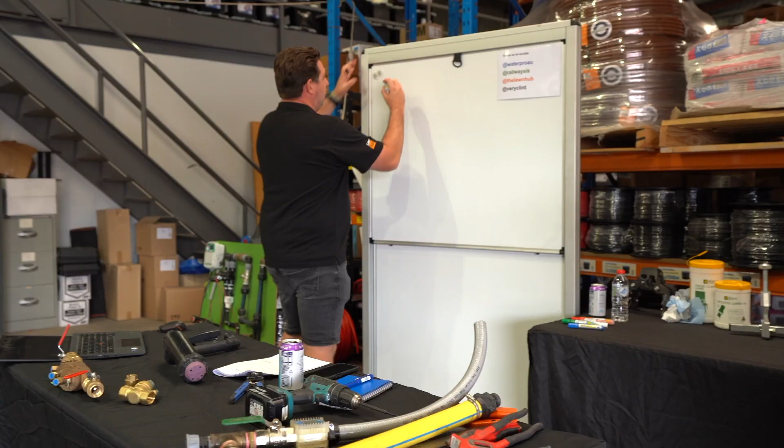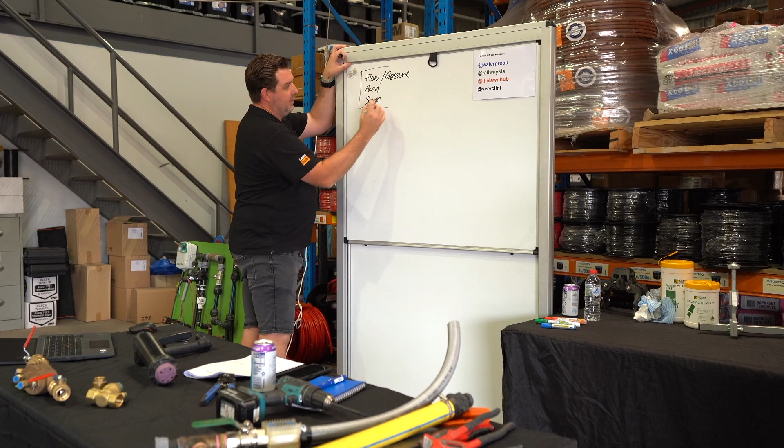So when we do an irrigation design, we require a few things. Obviously, we require the area that we're irrigating. We require the specification, so we've just talked about that specification. I might write this down as I'm doing it, actually. So we need the flow and the pressure, or the flow versus pressure. We need the area, we need the spec, and then what they want to do.

So we'll go to Mount Barker this time because I've said Playford enough. So we're doing some work for the city of Mount Barker. We might have a council specification, which they do, and then we'll have a landscaper that's asked us to do a design and construct because they're going to be doing the work. We occasionally get engaged to do a pressure versus flow test on behalf of our commercial clients so that you guys don't need to do it. Obviously, it's a third party doing the test, so the burden of it being right falls back on us.

We use our GPS unit to do a walk around of the area, so we know exactly where the oval starts and finishes and where the garden beds are going to be. If that area hasn't been built yet, then we'll rely on landscape architects' plans to design around. We'll look at the specification, and then we'll start the irrigation design process. The one thing that's not clearly outlined initially is the pressure versus flow test.

So we've got these test kits that we use and hire and lend. This is by no means a sales thing. Most commercial businesses would have a version of this in their business already. So we would use this to test the flow and the pressure.

Actually, I probably should go lower, shouldn't I? I keep forgetting about my cameras.

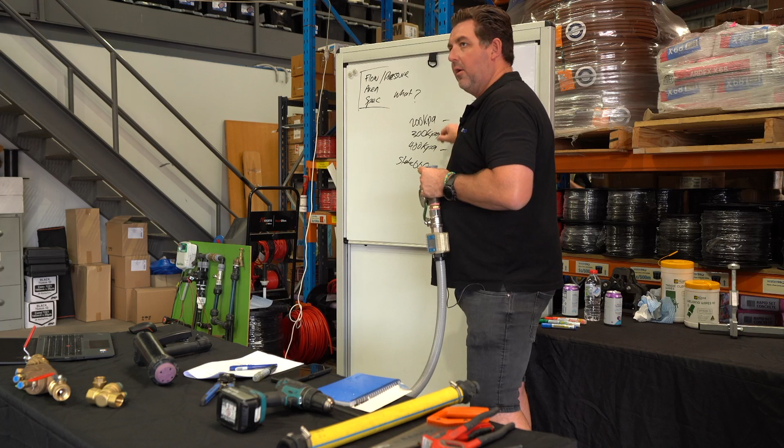So what you'll find is those flow rates will change as they go. Like, we'll open it and get to 400. We might get 60 litres a minute coming out. We might go to 300 and get 80 litres, and we might go to 200 and go to 100 litres. So the more we're opening that up, the more water's coming out in litres per minute, but it's at a different pressure.

And that's important to know for a lot of people that are beginning in irrigation. They're not aware that there's a difference between pressure and flow, and sprinklers require both numbers. Both numbers are important, so you'll find that you need a certain litres per minute with a certain pressure for a sprinkler to pop up and operate.

If we were getting static pressures below 440, that's when we'd probably start having a conversation about putting a tank and a pump in. A sprinkler is going to need 350, and so with that 440, we start getting losses through things like backflow. So that's a backflow prevention device, which is what I was talking about before. You might lose 50 kPa through this, and it varies depending on the backflow, and all that data is available on the product information sheets that come with these.

But yeah, once we get below 440, we're really putting in a tank and a pump, and in a lot of cases the flow's enough, so we might be getting 120 litres a minute, but at 200 kPa. So we can put a small tank in, have the 120 litres a minute fall into the tank, have a pump in the tank that's pushing the water out at the same speed, but at a higher pressure.

So you don't necessarily need to have a 40,000 litre tank, and sometimes you might need to. Sometimes you can have a 5,000 litre tank, and all it's doing is taking the water that's low pressure at the right flow and pumping it out at the right pressure at the right flow. Does that make sense? Yep. If not, I can talk about that again in more detail after.

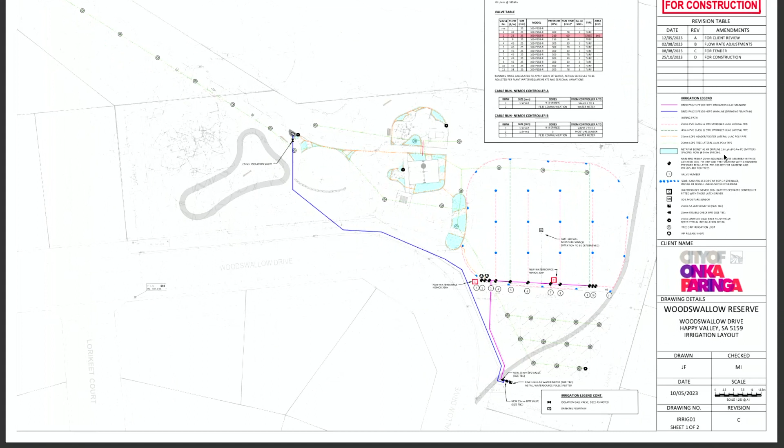So I guess on that, I would encourage you to all do a pressure versus flow test on your sites before you start installing, and see that it matches up with the, where's that PDF gone? So most companies will put a section on here around the pressure versus flow. So we've got our system duty up here. I know you probably can't see it, but I think it says 45 litres a minute at 385 kPa.

I guess when something goes wrong on site, there's two sides to it. There's one, let's fix it, and there's the other, who we're going to blame. And I think the best way to avoid the who we're going to blame, or maybe let's fix, probably both of them, is to find these situations before they happen.

So if there's a system duty issue and the water flow will not do what it needs to do, so you think we've designed this irrigation system based on numbers that we understand are correct, and then something's changed on site. There's been a bunch of houses built behind there, the water authority has dropped the pressure because they're getting too many water bursts. A new school's been built, there's lots of things that can affect the flow.

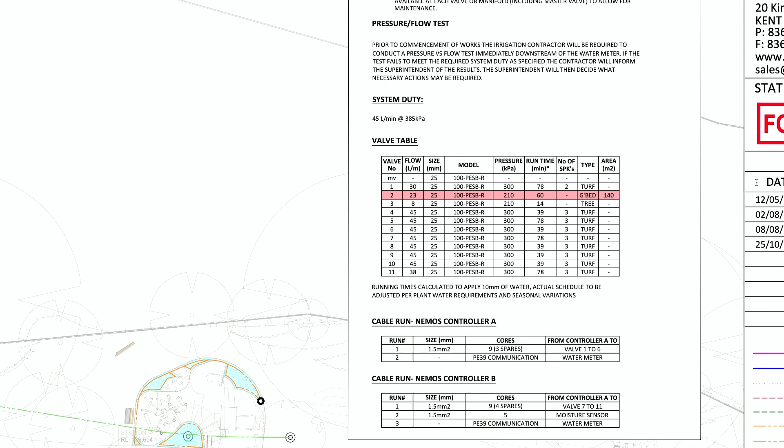If you do a pressure versus flow test at the time of install, before you start digging up any ground, it gives you an opportunity as a contractor to go back to either the designer, the landscape architect, or the client and say, something's changed. Do you want us to just stick it in and you're going to pay for a system that doesn't work, or do you want to redesign it, or do you want to put a tank in, or how do you want to handle it? Because when we quoted the job, we quoted it based on the design.

The flow doesn't match that design now, and we've had situations where the council will say, oh yeah, we probably didn't take that into consideration. We're happy to get a variation for a tank and a pump. Obviously that gives you more work as a contractor, but it also ensures that the system's going to actually work.

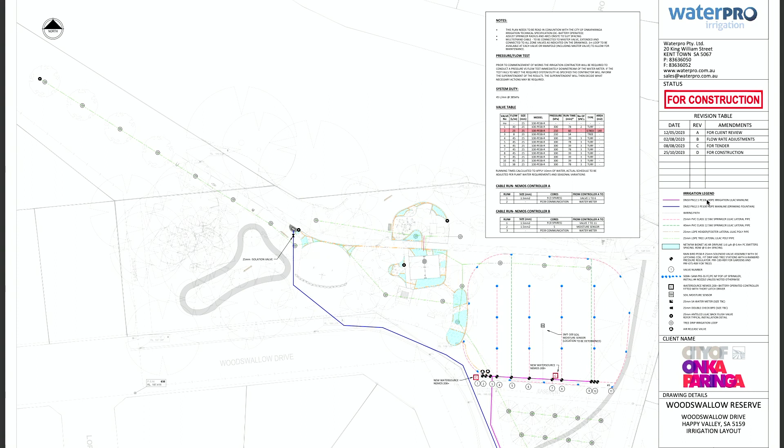So I would encourage you, once you get those plans, to check over those dot points that I've put there before you start installing the job, and really, almost counterintuitively, read the instructions before you start putting the shelves together, kind of thing. And I know for me that's not something that I would usually do, but you almost start building this in your head before you start digging trenches, because it's very easy for our design team to draw a line on a piece of paper. It takes them half a second, but that same line might take you half a day.

And if you can pick up on issues that you might see arising before you start, or even suggested changes, we're not closed off to the concept of making changes or improvements around our designs. Like, if you say, look, it doesn't make sense that the main line goes all the way down there, can we just shorten it 20 meters? It's less than a roll, then there's a commercial implication to that. We don't have to buy a 500 meter roll of cable, we can buy a 100 meter roll of cable.

We're open to that, and if we can take that back to your client and say, look, we've redesigned it with a shorter main line, are you happy with it? They'll be like, yeah, that's fine, that makes sense. They'll probably want some money for it, but we'll use different reasons. So

I'll talk briefly about precipitation. All of this, get your spec, get your plan. The designers are really effectively trying to mirror rainfall in an area. Obviously, if it rained every day for 5 mil of equivalent rainfall on every area, we wouldn't need irrigation. It's not the case, and here in South Australia we go for long periods of time without rainfall. So what we're doing as an irrigation design company, and you as an installer, is trying to simulate even rainfall over lawns and gardens.

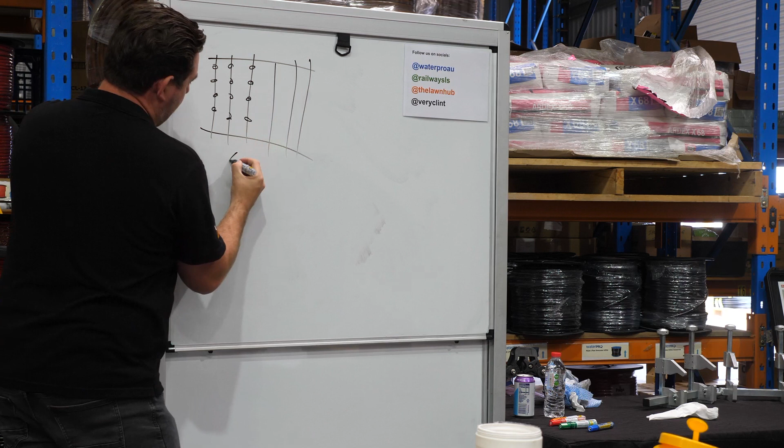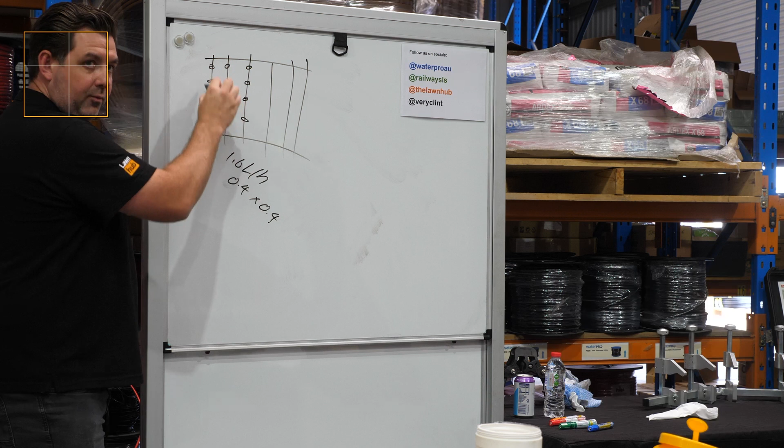So in South Australia, drip tube is installed at 0.4, 0.4, 1.6 a lot. And so there'll be a dripper every 400 in all directions, right? And they're 1.6 litres per hour, 0.4 by 0.4. So when we install drip tube at 400 mil spacing that way, and the drip is 400 mil apart, and use a 1.6 litre per hour dripper, that area gets 10 mil of equivalent rainfall per square metre per hour.

And that's important because we can use that information to understand scheduling, and then the councils can use that information to work out watering budgets and when they're going to be watering and watering windows, and all of that's really important, and I'll talk about that.

If you start putting drip tube closer together, so 0.3, 0.3 or 0.3, 0.4, that number, that's 10 mil, goes up to 13, then up to 17. So if you're doing 0.3, 0.3, it's kind of 17.7 mil recurring, which is too much water in some cases for the soil profile to take. So we're thinking about how much water the soil can take when we're designing these systems as well.

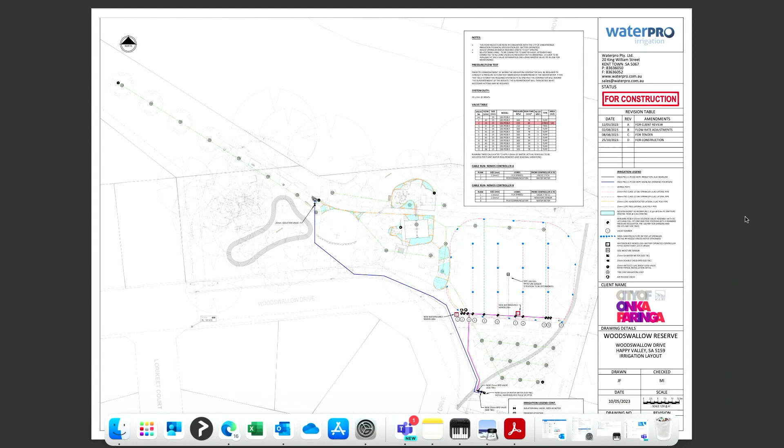And that's why when you look in the Playford spec, you'll see that it's 0.4, 0.4, 1.6. It makes it very easy for them because 10 is such an easy number to schedule and an easy number for them to divide on site. Can you bring that plan up again, Kira? You might start to see it on more plans now, but we do it on their plans definitely. And can you zoom in on that table, please?

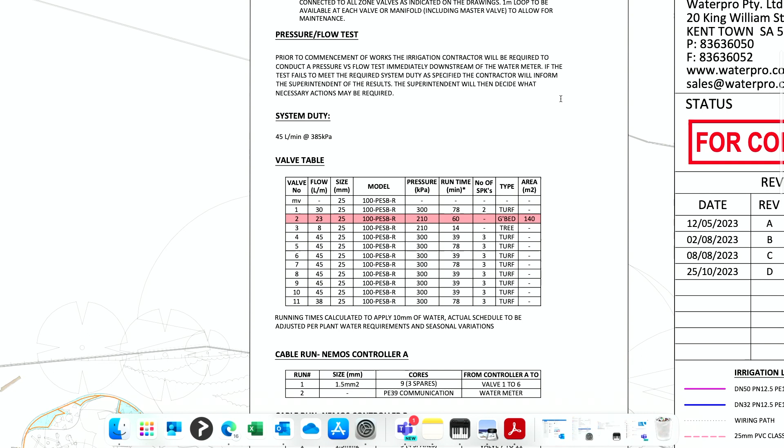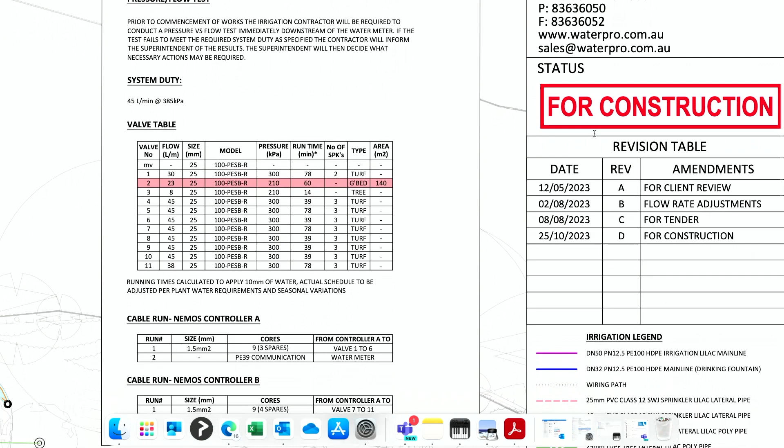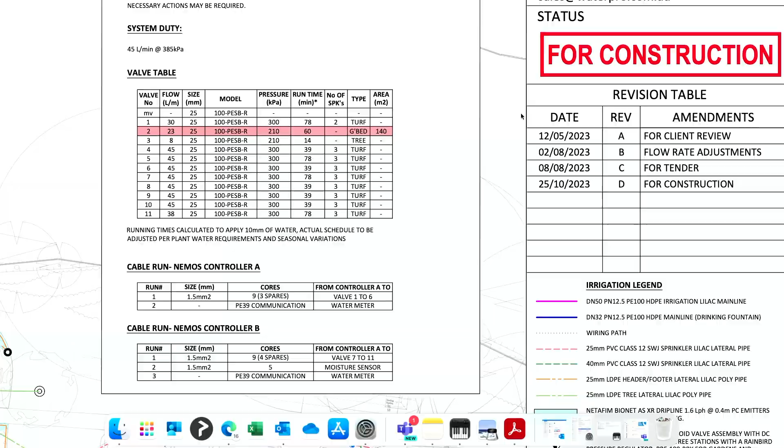Up here, we actually have, is it there? What's that asterisk mean? Usually, we will have the number of minutes required to deliver 10 mil. And I'm thinking that's what that number is. Yeah, that would make sense because the drip tube is 60 minutes. So Playford asked for that. They want that information so that they can reverse engineer what they desire.

So they've got IPOS. There's a standard that is designed to be met to keep turf at a certain level. So if you're an A-grade cricket pitch or a footy field, they might say that needs to be IPOS level whatever. And to do that, you need to deliver 25 mil of equivalent rainfall to every square metre every week for that lawn to grow to that condition under normal weather conditions, which might be 30 degrees Celsius. And then they scale that up and down depending on it getting too hot or if rain events occur.

So if that was the case for garden and they needed to deliver 25 mil a week, they know that they've got 10 mil per hour on irrigation, so they just need to divide that 25 by 10, and then they work out that they've got to do 2.5 hours of irrigation over the week, and then it really comes down to the council understanding when they want that to happen. And obviously, you don't want to do that every day and have micro watering events because you really want to encourage deep root watering.

So we might divide that into two 1.25-hour waterings, 3 to 4 days apart, with the idea that the water gets deep into the soil to encourage root growth, which is not really anything that we take into account because the scheduling occurs after we or Waterpro have been involved.

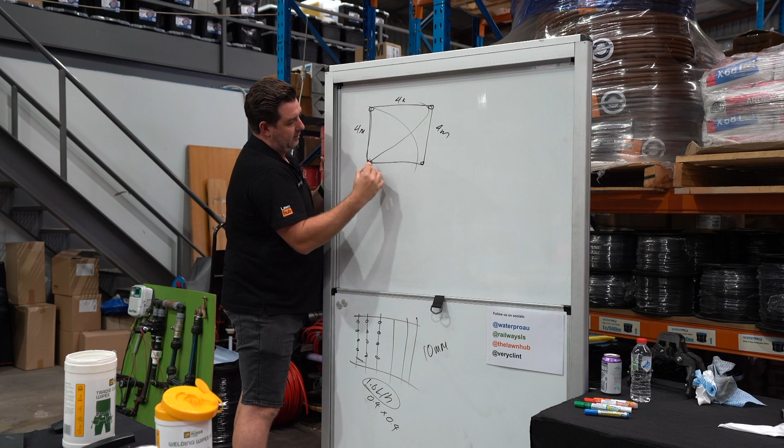So I'll just draw the reason behind what I'm talking about with MP rotators. So when you have a basic square, let's say 4 meters by 4 meters, it's probably 4.1, we can put an MP rotator in each corner, and all they'll do is they just go head to head on each sprinkler. And we don't need to put, say, these two on for a different amount of time to these two. They can all go on at the same time, and they're designed to match.

So when I'm talking about matched precipitation, we could put a catch can anywhere on this lawn, and the amount of water that falls into that plastic can will be equivalent to the amount of water that falls into that plastic can, and so on. And that's what councils will ask us to audit when we're going out and checking irrigation systems that you may have installed. So if you've done a footy oval or even just a local park, there'll be a desired distribution uniformity, which is, I guess, the inconsistency between these catch cans needs to be at a certain level.

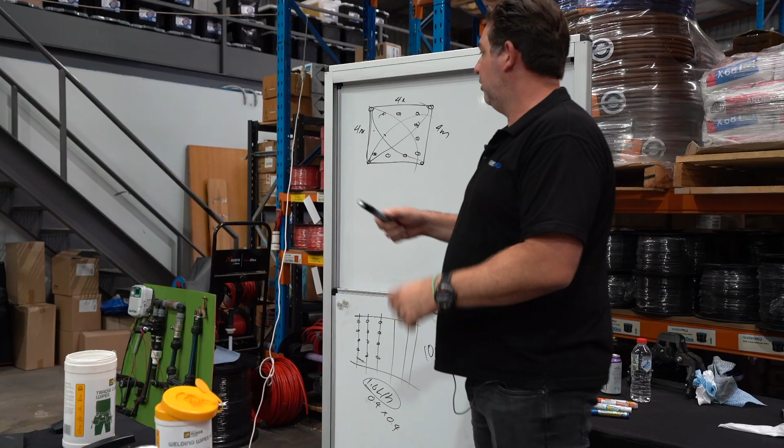The reality is it's never going to be 100%. We would go out and audit a system that hasn't been installed badly. It's just old, and there's sprinklers that might be tilted, or they might be cracked, or the nozzles have been drilled out to get more water out, or any number of stupid things. And the distribution uniformity might be 40 or 50%. The council might be happy with you getting it up to 75. And so the council will say, look, if you can get above 75, and I don't know what Playford are going to do, but I'm going to guess it'll probably be closer to 80. They're going to say that we want an 80% DU to be met on these 3 areas once you finish the job.

And they're not doing this yet. This is just what I can see coming. We would go out and do a catch can test. You could do your own catch can tests to try and check your DUs before you hand the job over, and then obviously pick up any potential issues before they arise.

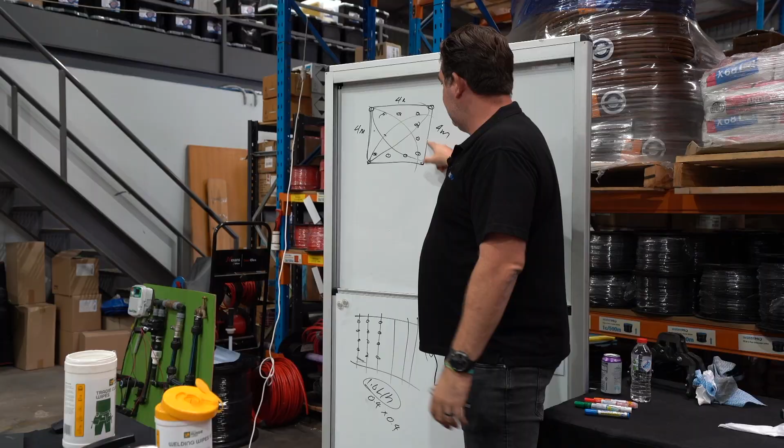Put your cans out, you run your sprinklers for, say, 15 minutes, and then you measure all the volumes, and then you can put them into an Excel spreadsheet. It'll spit out a number and say, look, your DU's this area here is an issue, because they'll have numbers of mils in them, so they might all be consistent except for here, and that it'll be visually obvious because that sprinkler's tilted, or it's not turning, or the water's just falling out of it. And you might be able to see that before you even do the test.

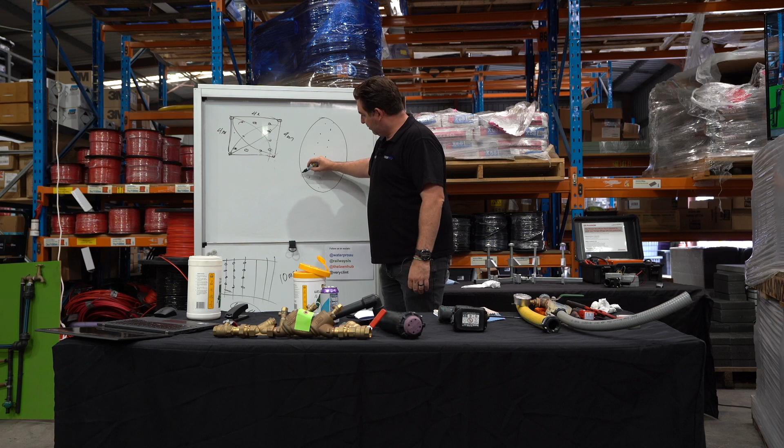The idea behind the test is that they've got something physical from a data standpoint that the council can use to take back to you and say, you need to rectify this, there's a problem. When we do ovals, we don't use MP rotators. So a lot of the matched precipitation needs to be taken into account by our design team. And an oval is probably not a hard one to do because you're kind of just running sprinklers.

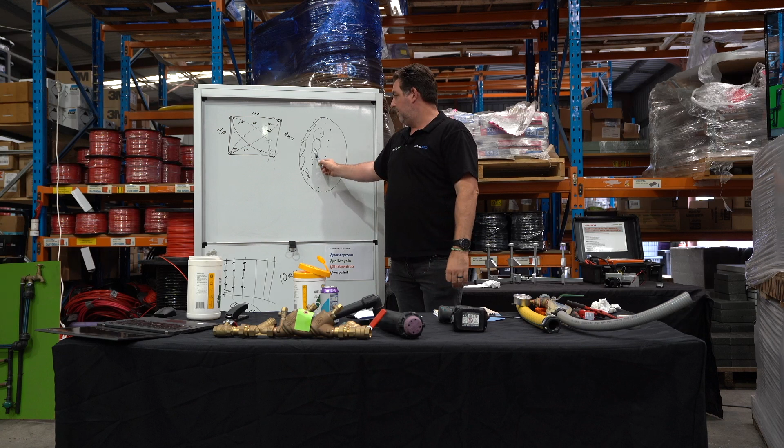This is not by any means a great design. I'm just trying to highlight to you that when we have sprinklers on the outside of an oval, they're generally just doing 180. And when we've got sprinklers in the middle of an oval, they're doing 360s. We would either nozzle down these ones, so we would have a lower flow nozzle on the outside. Sorry, a higher flow nozzle on the outside, because they're going over the same area twice. Is that right? Did I say that right? Lower flow, yeah, because they're passing over the same area twice for every one of that.

Or they all have the same nozzles, but the sprinklers on the outside of the oval are on their own valve, and they water for less time.

Sorry. I got back from 7 days in Fiji yesterday and I'm a little bit doughy still. More doughy than normal.

So we take care of that at design level. You shouldn't have to worry about it, but I think it's important for you to understand it so that guys that are doing enough of this, they'll look at the plan and go, hang on a sec, why are those nozzles the same as those nozzles but the recommended run times haven't changed? Or why is that sprinkler on the same station as that? So we've got a full circle and a half circle on the same valve, but the designer hasn't nozzled them down to make that work.

That doesn't make sense. So you can go back to your designers and go, look, was this just a mistake or was it overlooked? And there might be a reason. They might say, no, those outside sprinklers are actually running 360. They want to water the outer even more. So thanks for asking, but no, it's all good kind of thing. And so that will give you a precipitation rate. Now, I don't even know off the top of my head, but you might find that these 8 doubles might be closer to 25 or 40 mil an hour.

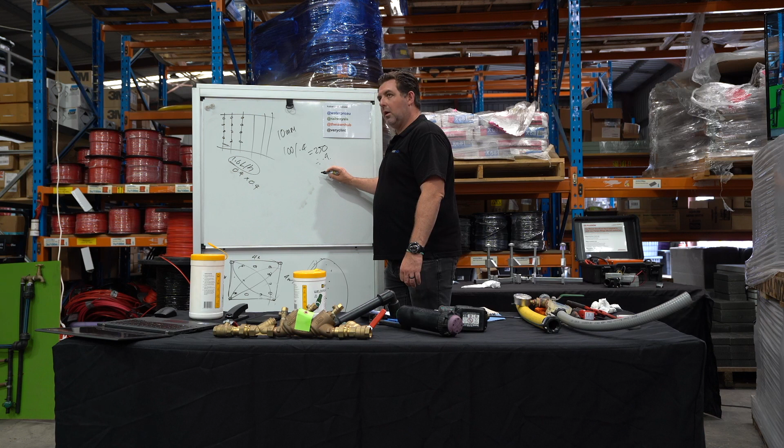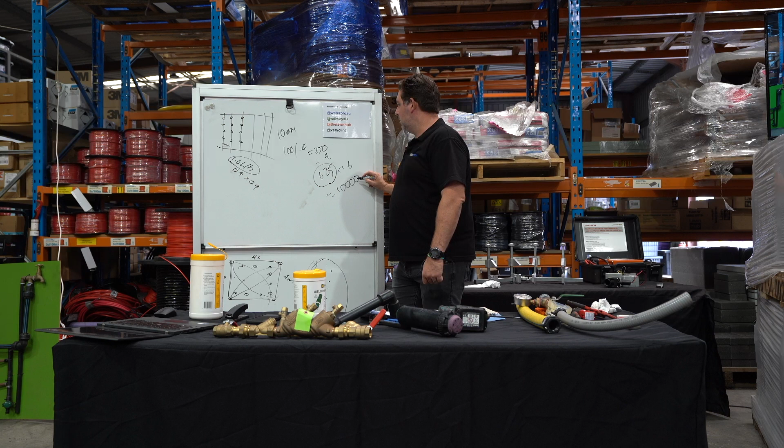So that's how many meters of drip tube would be required for 100 square meters of area. And then if you divide it again by 0.4, you get 625. That's the number of drippers that would be in the area. And then you times that by 1.6, which is 1,000. Times by 1.6 equals 1,000. Is that right? That's weird. Which is the number of litres that's going to get delivered every hour in the 100 square meters. So that's how we get our precip.

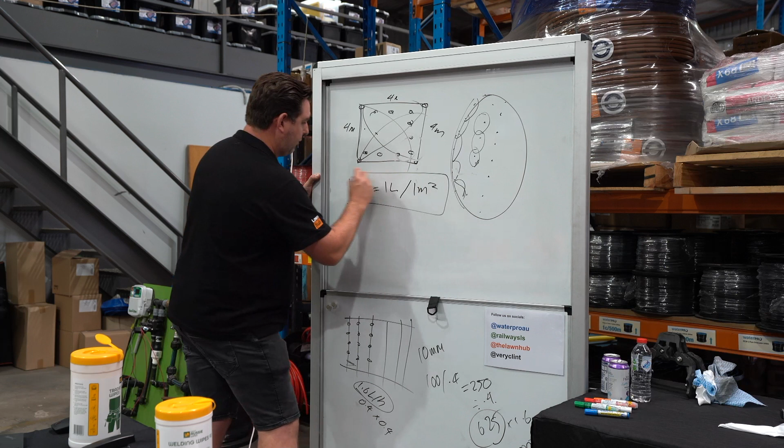So 1 millimeter of rainfall is 1 litre of water for every 1 square meter of area. I'm probably jumping around a bit because that's how my brain works, but 1 mil is equal to 1 litre per 1 square metre. That's important to remember. You can use that when working out the size of a rainwater tank that you might be able to have at home based on the size of a roof of a shed, because you know that the heaviest rain that you might have in a winter period is 100 mil a month, and so you can times your square meters of your roof by 100, and work out how many liters you get for every mil of rain you get.

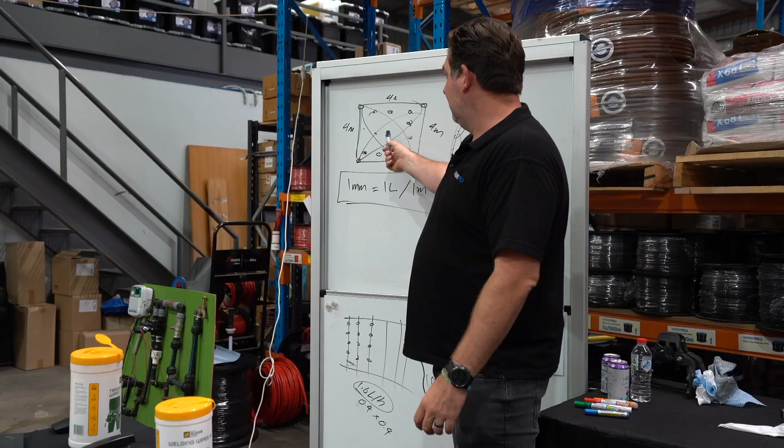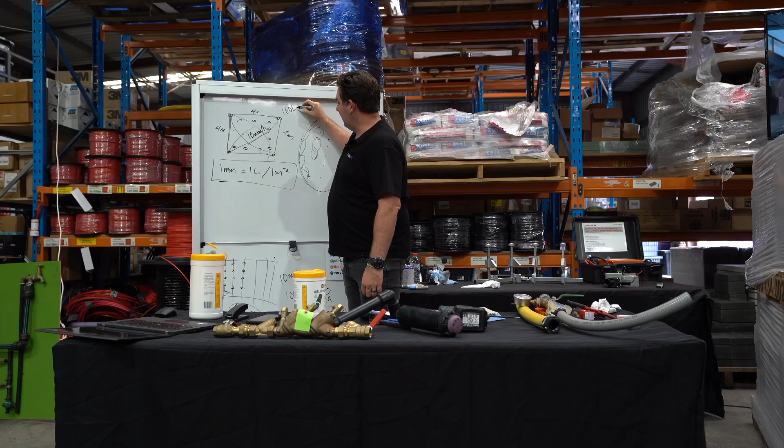Because sometimes people will put a rainwater tank in at their house that's too big, and their roof is not big enough that it will ever fill that tank because there's not enough rainfall in the area. And sometimes people will put in rainwater tanks that are too small, expecting that they can water a whole lawn for the whole month or a whole year from a 1,000 litre rainwater tank. So we know this is a 10 mil per hour of rainfall kind of thing. That's a 16 square metre lawn. So you've got 160 litres per hour of watering. So with a standard 1,000 litre rainwater tank, that lawn is going to get 6 hours of watering, and that's done.

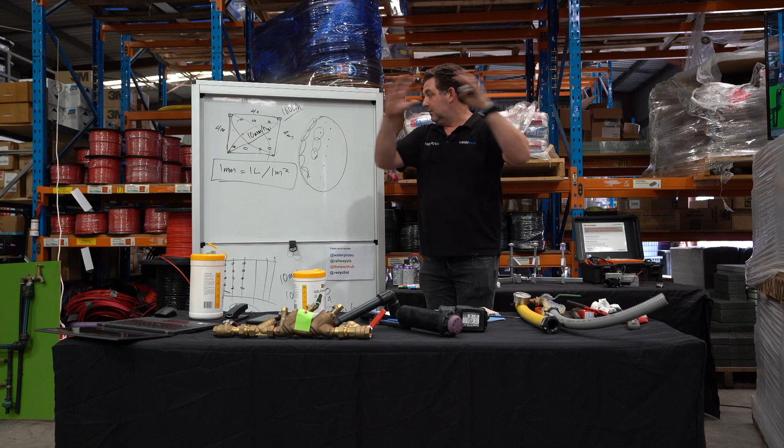So this is the beautiful thing about the science of what we do: everything that we sell and everything that you use and everything that you install has data behind it that enables you to work out the theoretical way that it's going to work before you start doing it. And by doing that, if we do everything that we said, so you check your flow versus pressure before you start, you check your scale on your plan before you start, all the pipe is the right size, everything goes in as per the design, it will just work. And when it doesn't work, there's a reason. It's not a case of, it was close or we hoped that it was going to work. Hunter sprinklers, sometimes it's 40 mil, sometimes it's 36 mil. It's not the case. It is what it is.

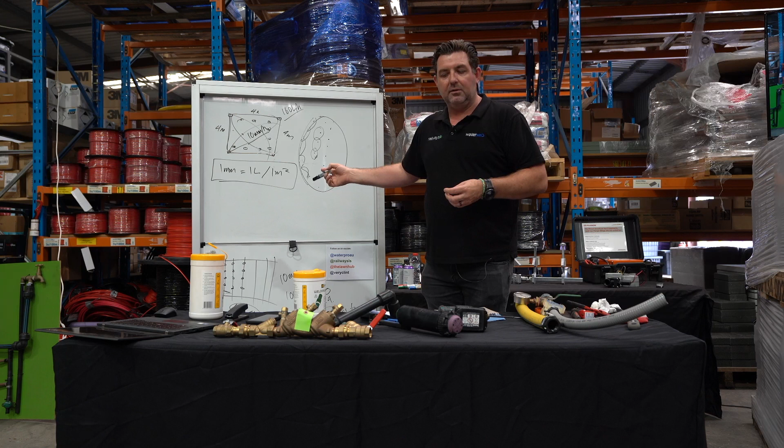It's hydraulically connected back, like it's all connected to itself. And so you can know that if you've checked that water flow versus pressure and you install things properly, it will work. And the events of it not working are very low. And I guess then we start to understand when it doesn't work, it's because someone's put a solenoid valve in backwards, or the mainline pipe's been undersized, or there's rocks in sprinklers, or flow controls haven't been open.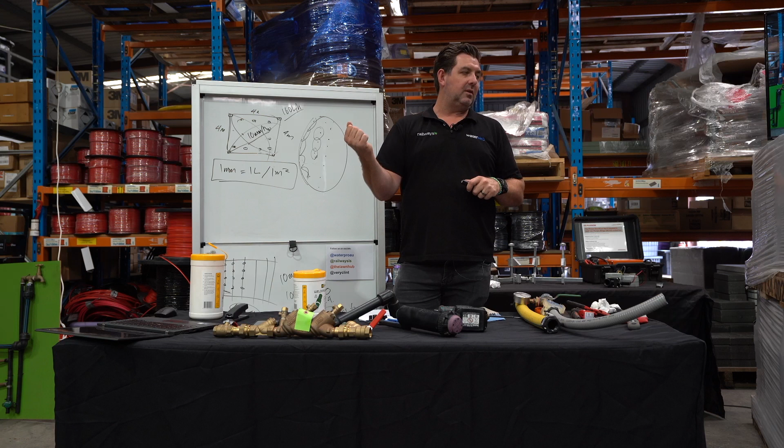Going back to the drip and how Clint just sort of worked that out, that's how councils want to do it. They want to have that standard, right? So they know that they've got so many square metres of garden out there that they're delivering X. So when they turn it on for an hour or half an hour, they know they're putting out X. So that's why it's critical following the design for what Clint said as well, right from the design part. So the systems, it is what it is, but also council know that I should have put out X amount of water last night due to having X amount of dripper over X amount of square metres. Does that make sense?

The information that they take from that design then can get punched into central controllers. So obviously there's physical controllers on a lot of sites, but then a lot of those controllers connect back to a computer that they might have in their council offices, and they can make automated decisions around sprinkler systems and drip tube systems not turning on because there's been a rain event of 12 mil or more or 8 mil or more.

Sometimes they'll get a lot of shit for it because residents will say, why are you watering? It's raining. In a lot of cases, the rainfall is not enough for the system to turn off. So, we're trying to put out, say, 12.5 mil on an oval because we've put some fertilizer out today and we really have to water it in, and there's a forecast of 3 mil of rain overnight. So we might do 9 mil, knowing that we've got 3.

The danger is rainfall's generally theoretical. Well, it's theoretical at that point. Until we know that we've had 3 mil, we shouldn't really be adjusting the amount that's going out there, especially if we're applying a herbicide or a fertilizer, because if you don't put the right amount of irrigation out, you might burn the lawn, or it won't work properly.

What time is it? So that's all pretty clear. All right, I'm going to talk about controllers next. What time is it? 2:45. I'll talk about controllers. I reckon we'll have a break at 3, and then we can kind of go from there. What time are you meant to finish work? That's right. I'll say you left at 4:30. What time? Yeah. I think we'll probably be done by 4. So I'll talk about controllers.

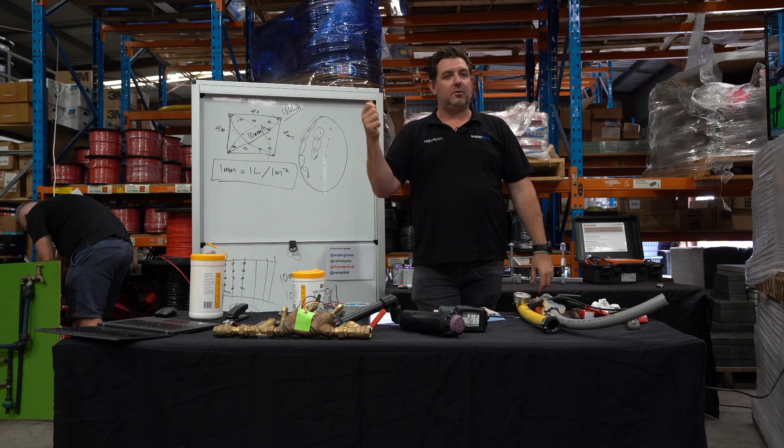Once we start getting up in the number of valves, it becomes challenging from an install standpoint because you've got these big looms of cable, but it's also quite expensive to run. If you had 100 valves, you need 101 cables to go out through the whole area, because you need one cable for every valve and the common to every valve.

So there's a product called Decoder that is available in all the brands. And what that does is it's just a 2-wire path that goes to the whole area, and it sends out a signal to a decoder, which is like a translator box, really. I know that's a weird way of describing it.

Have we got decoders here? Can you grab me one of them next?

So what the controller will do is it'll send a signal out through the cable to say, decoder number 91648, turn on. And so that receiver translates that signal and opens the valve. The advantage of that is you're only sending one 2-core cable out to the whole area, so you don't have these big looms of copper, which obviously there's risk of theft, and it's a challenging install, and it's quite costly.

Obviously, the cost of copper is going up more and more. So once they get above a certain level, they'll go to decoder, and the copper cost comes down, but then the actual cost of the hardware goes up because you're buying a decoder, which is that translator product, for every solenoid valve. Decoders now cost, I don't know, I'm going to guess $100. Is a decoder $100? $130? Yeah, I don't know. I haven't worked in the shop for a long time.

So these are the two cables. I'll pass these around just for anyone that hasn't seen them. I know there's a bunch of you that have seen these before. You want to see them? So you'll see the two wire path's quite thick. This is a residential cable, so this is a lot smaller than you'd be using on your sites.

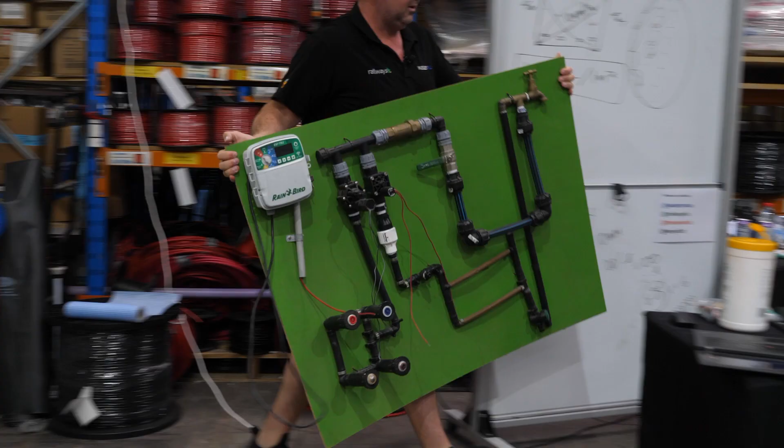The decoder cable can go a lot further for a lot longer, so that cable there will go for kilometers, whereas the residential cable that they're holding up the front here is probably good for 100 to 120 meters before there's voltage drop, and there's some voltage drop charts in here on the next page. That's not a decoder, that's an RVM. Yeah, the decoder's like a toilet roll.

So that's the decoder. This is a Hunter decoder. Obviously Rain Bird have a decoder as well. The signal goes out through the two wire path. This translates the signal to on and off, turns the solenoid valve on. You'll notice there's copper here. These are quite sensitive to lightning. And one of the biggest risks you'll have with decoder controllers is the damage that can occur with lightning strikes. And so I talked about this right at the start about having the ohms resistance tests done on decoder systems.

See the copper rods in the corner over there? They get used for lightning protection on these kind of systems. They'll get smacked in that deep, and then they have, I don't even know what the product's called, like a gel set around them. The guys behind you can probably explain it better than I can. You install decoder systems, obviously? Yeah. So I've never installed one. I only know the theory of them.

So the idea would be that if lightning hit the controller, any part of the cable, the lightning would get grounded through those rods instead of frying these devices, which are worth $100 to $130 each. All of a sudden you've got, like I said before, you could have 100 on a system. It becomes a very, very expensive problem if your lightning protection hasn't been done properly.

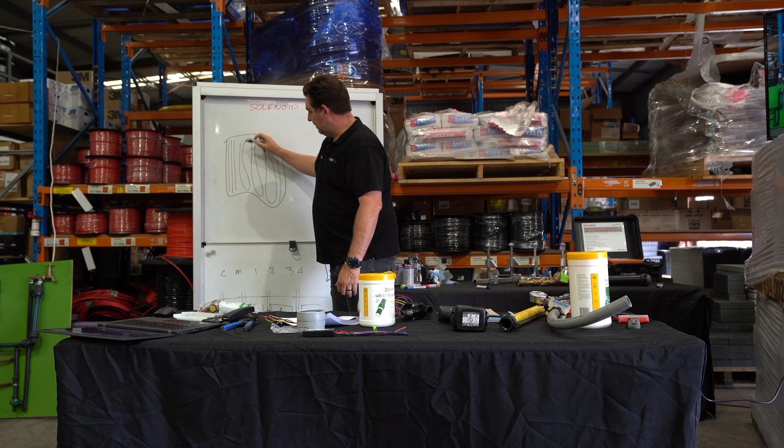So for a solenoid valve to operate, for the traditionally wired solenoid valves, you need to have a circuit completed, which lifts an electromagnetic pin in this coil, which changes the pressure in the valve and the valve opens. You can simulate that by turning the coil.

So you'll notice sometimes people, if there's no power to the site, they can turn the coil a quarter turn or thereabouts, and it will actually open the valve. It's simulating the electrical process that turns the solenoid valve on and off.

With the other one, the black and red cable, that's a 9-volt latching coil, so it actually sends through a pulse, latches it open, and then sends through a pulse to close it. So the polarity matters because it's not actually a continuous electric circuit that's holding the pin open. It's just a signal to open it and a signal to close it.

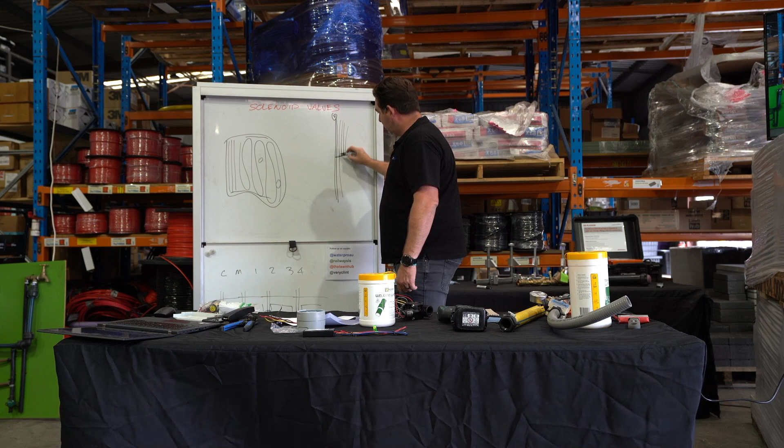So the decoder, where's the decoder? I don't know if it matters. Polarity, decoder runs to a DC coil. Do you know? I don't know. Does it? You think it does? I'm looking past you. You just worry about if that's zoomed in properly. What's that? Yeah, I'm just thinking, because decoder, the polarity does matter.

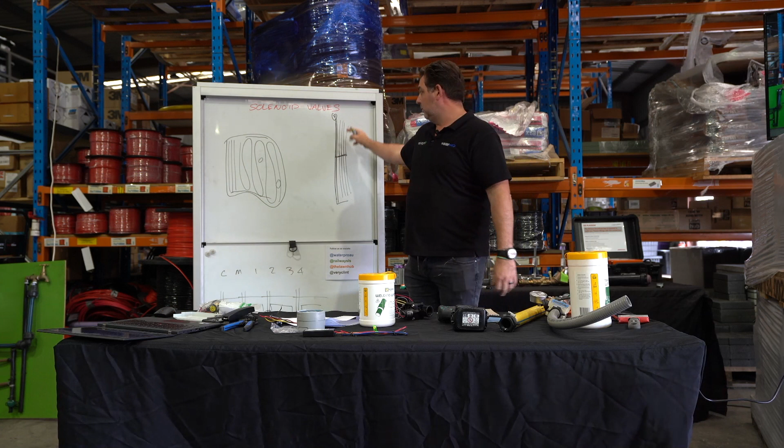Yeah, so I'll double check this because I don't want to give you the wrong information, but if you're using a decoder system, I believe you need to have a 9-volt latching coil. No, that wouldn't be right. Yeah, because it sends out a signal to turn it on and it sends out a signal to turn it off. So with a decoder system, like a golf course will use a decoder system because they might have 15 solenoids open all at once.

And their computer that they use to operate the golf course will learn the flow that is being used, because as I said before, it's so important to have that watering window maximized. They'll say there's a green on the other side of the golf course that doesn't use much water. We've got, say, 500 litres wouldn't be that much. Could be 500 litres a second. There's some big flows going out of golf courses. We've got 100 litres a second still available.

It's not being used. Let's turn on hole 5's tee block or hole 5's green alongside all the other ones. And then they'll turn them off, and the actual controller learns and will change its watering to meet the window rather than relying on the golf course superintendent or the irrigation team to do the programming themselves.

All right. What I might do is take a 10-minute break now and go through my notes and make sure that I haven't missed anything, and then we'll come back and do some troubleshooting and some hands-on stuff for the guys that actually haven't done it. I don't think I'm going to go past 4 anyway, but I just want to be conscious to respect your time and make sure that we're finishing on time.

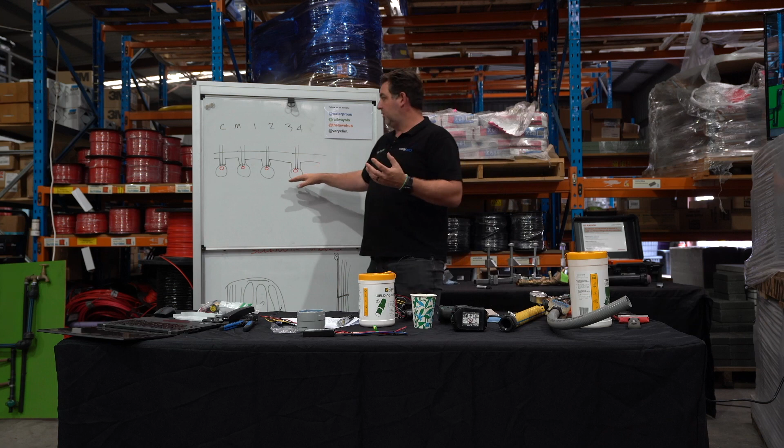Recently, we've seen some work happening where the contractors are in a rush, or they're trying to save costs. And there might be a garden area, and the drip tube is designed to be going every 400 for reasons that you understand now. And what they'll do is they'll just go like this, with the theory that that's good enough. All the plants will get watered. It's going to be okay.

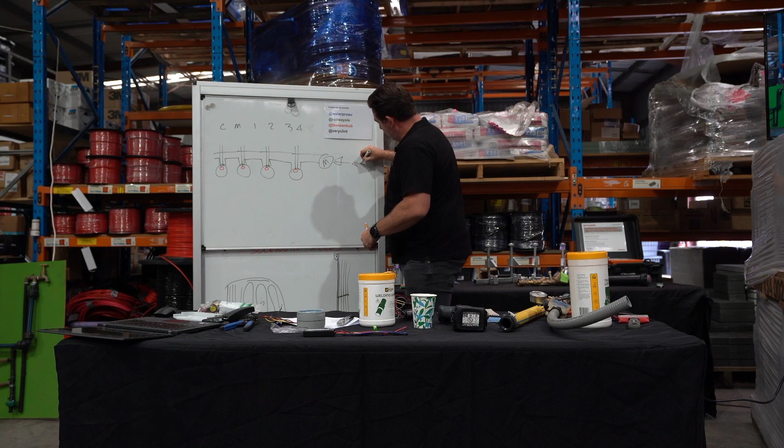The issue you have there is that there's going to be inconsistent water being delivered to that area, because obviously the drip tube's closer together, and then any plants planted along this area aren't going to get water. Beyond that, drip tube can't be run, so 13 mil drip tube, once it's run on its own for about 120 meters, water won't come out the other end.

And so if you did that, and that was a 300 meter, or even a 200 meter, because it rolls 200 meters, doesn't matter how much water you push into that tube, it's like trying to suck through a straw that's 200 meters long. There's too much friction and the water won't come out. And so that's why we have header pipes, which you'll see from my little board before. So the header pipes that you can see connecting the drip tube, it's not just there to keep it neat. It actually provides a hydraulic purpose.

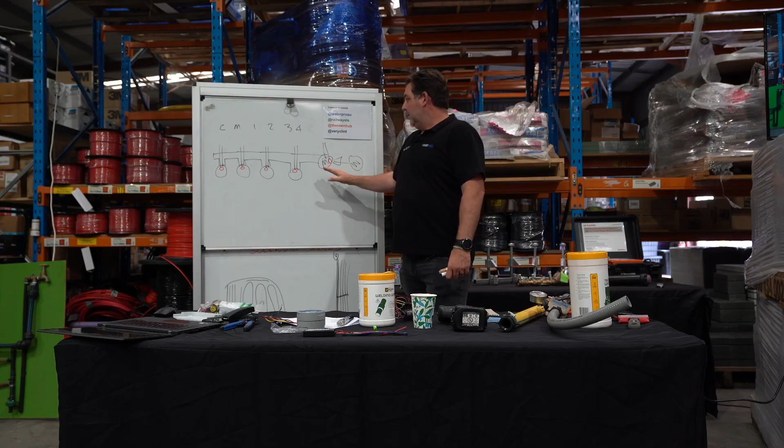And the water gets delivered down that main pipe into there and then continues down into there. And that ensures that you're gonna get enough water delivery to those drip tubes and you don't have that friction loss. So friction loss is probably something that we talk more about in advanced irrigation when we start to understand.

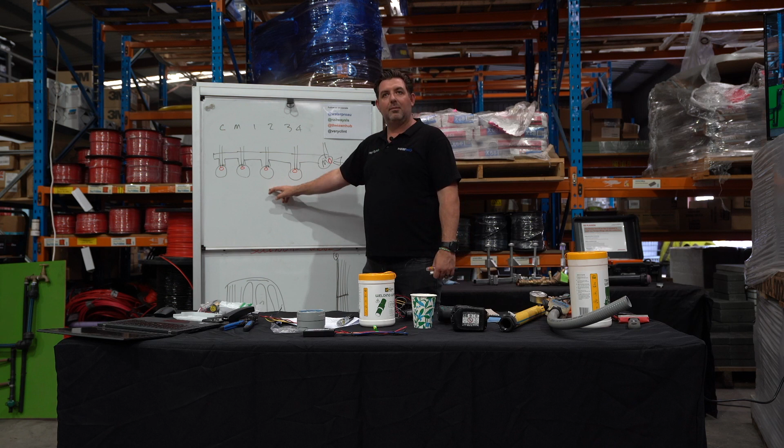Friction loss is really important, and it's something that the design team take into account. You don't want water hammer, and if irrigation systems are designed where the pipes are too small, that's when you'll get hammer, and we try to keep the velocity down below a certain point, and then obviously that doesn't happen. So, if you see on a plan that someone's used 63 mil blue line and you're used to them using 50 mil PVC, they're actually the same thing internally. And if you feel like you can get away with 32 mil because it's worked on other jobs, but this plan says 40, don't mess around with it.

We see it happen so much where even a solenoid valve, like we'll design a 25 mil solenoid valve going out to 63 mil blue line, which freaks people out because it's such a small valve up to a certain size pipe. But the flow is actually not that high. We just need to run that 63 mil so far away that we need 300 or 400 meters of 63 mil, so we're not getting friction loss down the other end of the pipe.

So I never want to say that the design department anywhere is perfect and that you shouldn't question them. I just really want to highlight that most of the time the design's right. By all means, I'm happy for you to question our team. I don't know how other people feel about it, but I guess I wouldn't like to see you make a change around a valve without understanding why.

We had a situation with one of the councils where we had a 25 mil solenoid valve going out to 63 mil. One of the guys that worked for the council knew more about irrigation than anyone I'd ever met in my life, and he decided that he wanted to put a 40 mil solenoid valve in because it fitted the visual of the 63 mil better. The issue was that there wasn't enough flow going into the solenoid valve to close it.

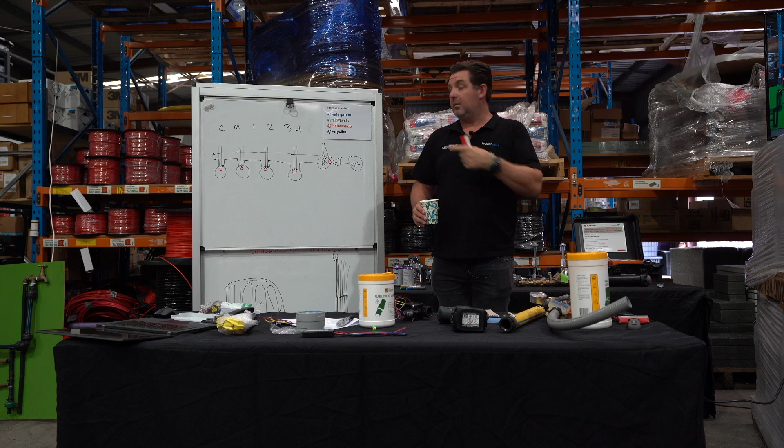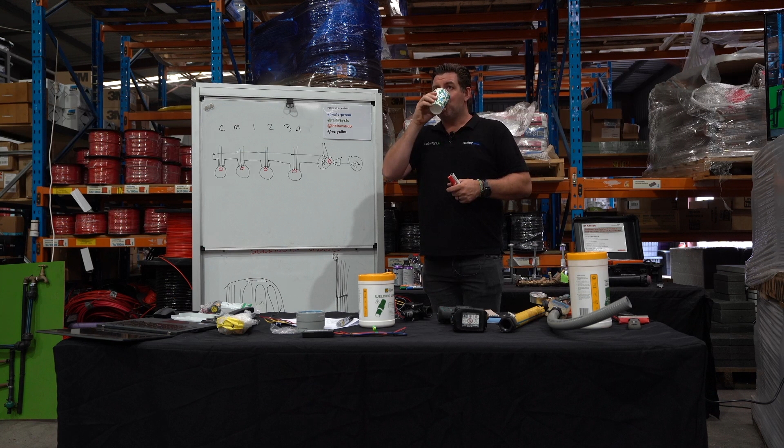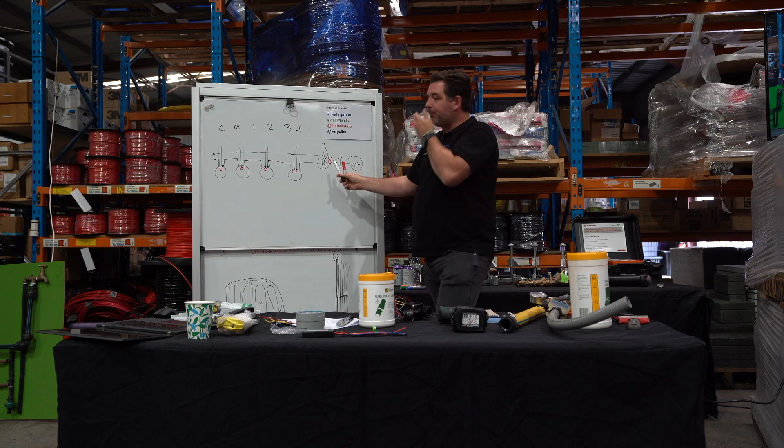So solenoid valves have minimum and maximum flows, which is data you can find out in Hunter books, Rain Bird books. And so a small solenoid valve, like these residential ones here, needs about 1.5 litres a minute for it to close. And you'll find if you do a residential courtyard and you've only got a couple of drippers on some pots, there's not enough water moving through the valve for it to shut. It will open, but it won't shut.

So what happened in this situation is the valve that was at the start of that pipe was a master valve. And so no one will ever pick up on it. It just means that there's no master valve in play because there's not enough flow going through there for it to shut down, and you've kind of defeated the purpose of putting a master valve. All right, I think I covered off that drip tube.

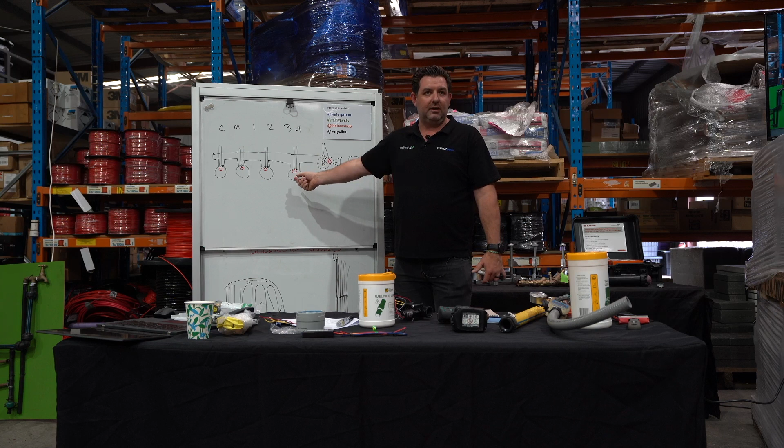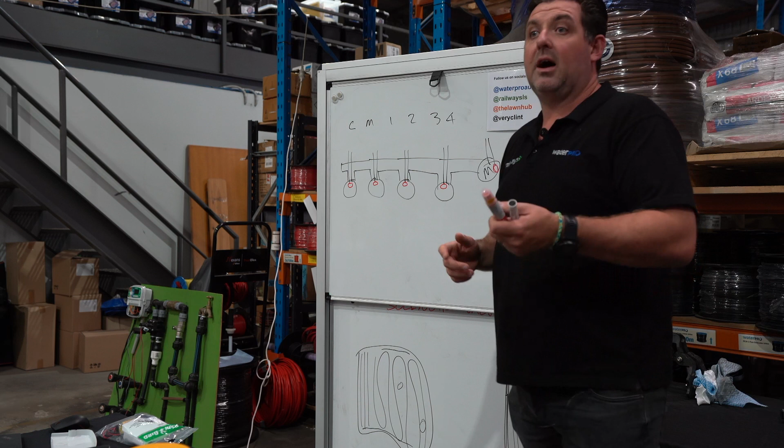So while we're on the topic of master valves, commercially, these will be installed a lot. Residentially, not so much anymore, and I think we're probably part of the reason that they don't get installed. I just think that it's an additional cost that a lot of homeowners probably don't need to bear for a system where they're home most of the time. The idea behind a master valve is to have an additional layer of protection in front of all the other valves.

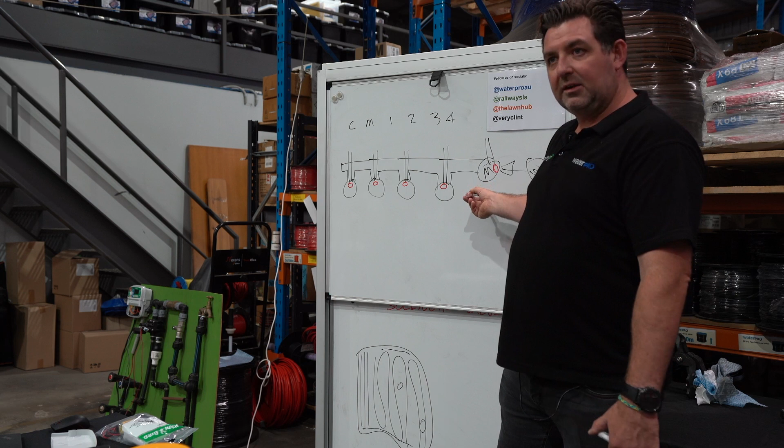So if this was, I've done it too close. We'll say the water's coming in from this side. So on this system here, the master valve protects the manifold. It might not be obvious because my drawing's shocking, but that's a manifold. They're solenoid valves, that's cable, and that's a master valve.

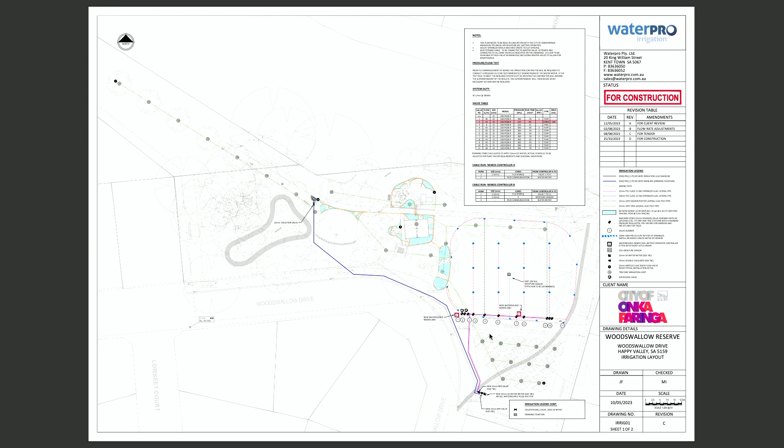The idea behind a master valve is, like I said before, to add an additional level of protection in front of these solenoid valves. So if one of these solenoid valves was to have an issue and it was leaking, that valve turns off when the system turns off, and it protects all of them.

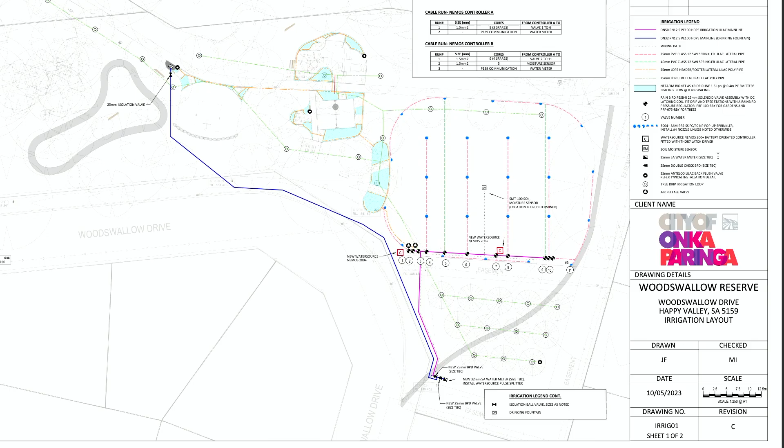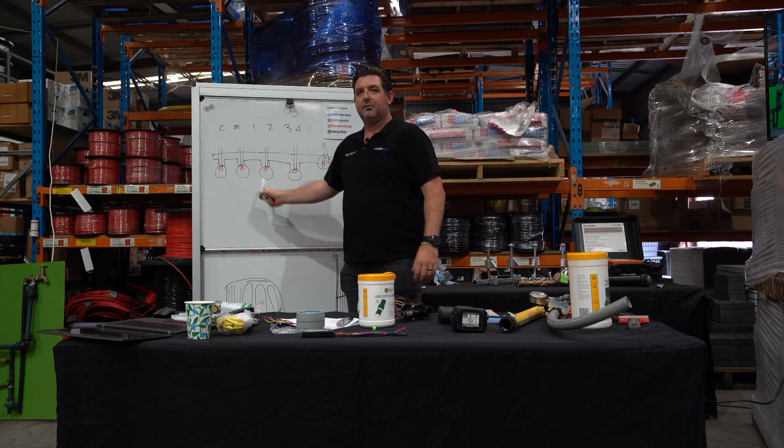When we get to commercial applications, these controllers will learn how much flow passes through a solenoid valve during any cycle. And so if it knows that this valve delivers 112 litres a minute, and then all of a sudden 180 is flowing through the flow meter, it'll shut the master valve off because it knows that that valve's broken. Something's gone wrong.

And so commercially now, a lot of systems will get installed with a flow meter. The way they're installed is really important. So you'll have specifications around the flow meter that they need a certain number of metres of pipe in front of the flow sensor, a certain number of metres of pipe after it, and obviously no bends and no joins.

And have we got some flow meters here? Just if anyone wants to have a look. So you can get paddle flow meters, like a paddle steamer. You can get laser flow meters that measure the particles in the water as they pass by. There's a bunch of different ways to do it.

This can also go to the level of, say you had a rural property and the water that you had in your tank was the only water you had. If one of these goes wrong, you've lost your entire year's supply of drinking and showering and watering water. The master valve obviously helps protect it.

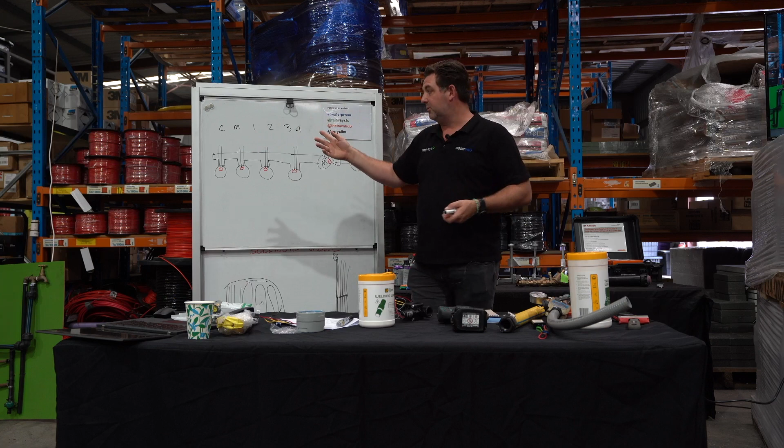If you don't have a flow sensor in play, you're not going to know that that's broken. You'll find that you'll have two solenoid valves on at the same time. So what will happen is the controller will turn valve number 1 on and it will start watering, but then there's water coming out of number 2 at the same time. So it'll only happen when the master valve's on. So you still need a level of maintenance there, but you'll find that you're protecting your water a bit more.

Anyway, that's master valve. I'm going to have some of my coffee. He did a good job.

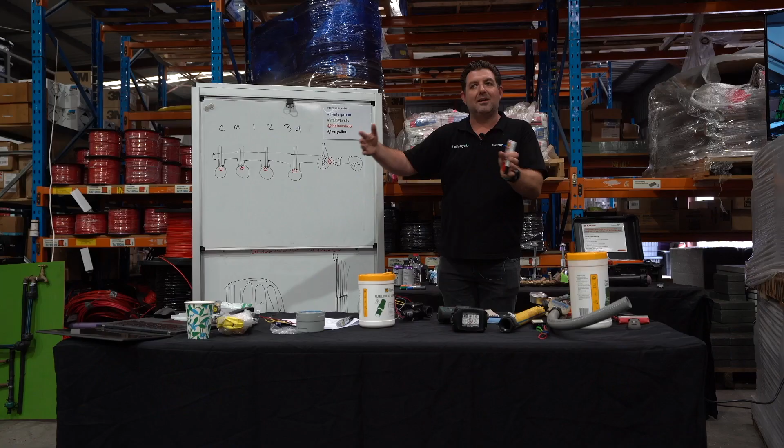So I want to talk about wiring up solenoid valves. The concept of solenoid valve wiring is the same. So that's just a water meter. Yep. And that's a flow sensor. And this is a flow sensor. So this is a kind of flow sensor that will measure, what camera am I on?

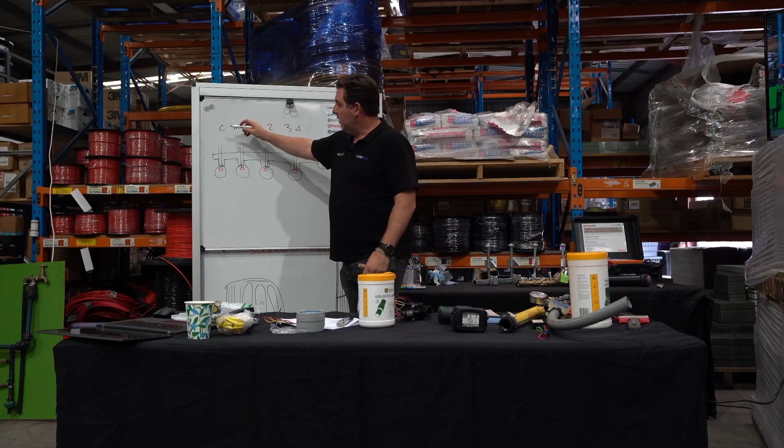That's a flow sensor that will measure the flow that's passing through the system while it's active. And that's the product that I was referring to that would understand how much theoretical flow there should be, and then if there's an actual flow variance, can turn the system off.

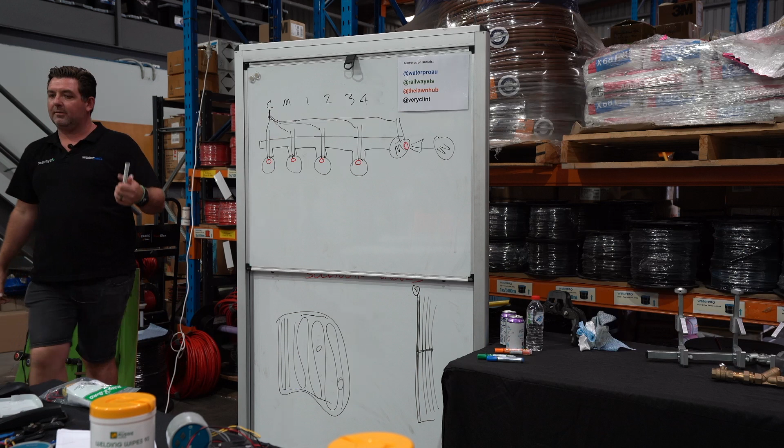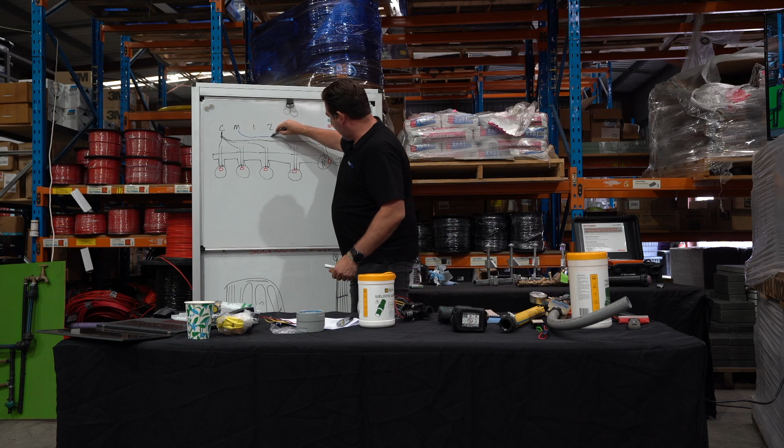This technology is available residentially now, so if you buy a Hunter Hydrawise controller, you could fit a flow sensor residentially. It's not a cheap exercise, it's probably $1,000 on top of your system, but that will tell you how much water is being used, and you can then track that against how much you're meant to be using, and then obviously set some rules around turning the controller off at the master valve if you find that you're getting too much water.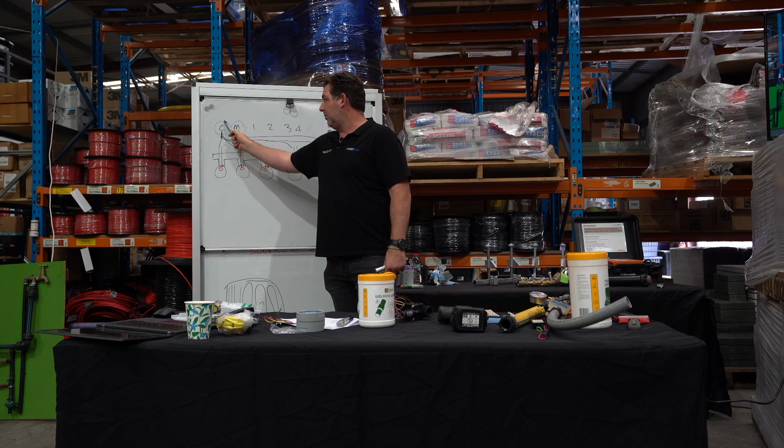This is surprisingly good coffee. You make this? I've been having shitty coffee all week last week. So. Yep.

So, question I was just asked was, when you say master valve, is that just a valve? So the answer is yes. In most cases, it's exactly the same valve that's here. But in certain cases, that valve might be, say, a Hunter ICV, and these might be Hunter PGVs. And so that one's rated to higher pressure than those, so that they're all protected from static, because you might have a really high static pressure, right?

So if you had a house that had, say, 1100 kPa of static, or even 900, but when you turn the valve off, you get a spike of pressure, you could put a high pressure master valve here, and then you could put normal valves here. And so when that's shut off, none of that manifolding is under pressure, because that's only rated to 1034 kPa. So if you want to protect it, you protect it there. Or you just have the same valve and it just becomes a secondary layer of protection, and it's fine.

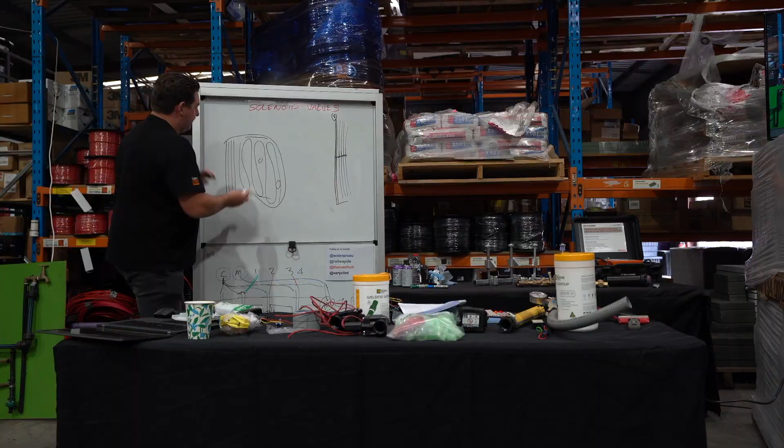No? What about at the back? Do you have a color system or you just work through? Yeah, see how you think about how crazy that is, that being black, yeah. That feels like that standard has stuck. But you think like if you're going out, I mean it probably doesn't really matter, but it's just going to save time if you're troubleshooting a system and the blue is valve 1 or 2 or the red is valve 4. And the challenge becomes a 20 valve system has two 13 core cables running out to it. So there's 2 whites, there's 2 reds, there's 2 yellows, there's 2 browns, anyway. I won't harp on about it.

So that's how you wire up, I guess, the theory of wiring. If you are going to be doing irrigation regularly, I strongly encourage you to buy a set of quality wire strippers. The solenoid valves, we'll go through troubleshooting. Solenoid valves obviously require electricity and water to operate.

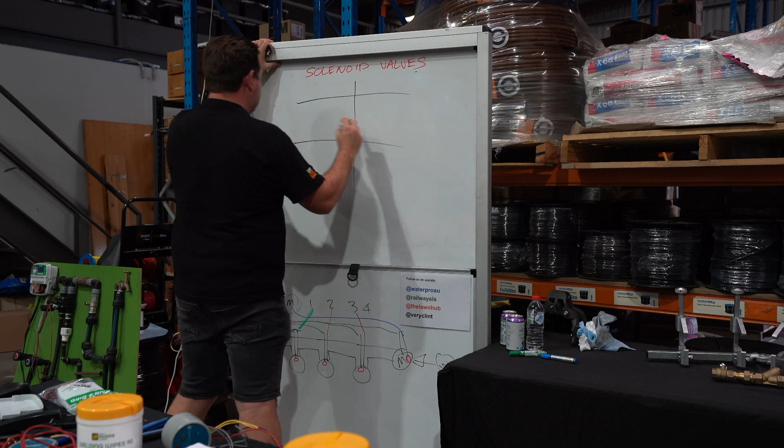If you have a situation where your electrical joins aren't done well and the solenoid valves aren't wired correctly, they might not turn on. If you haven't used waterproof gel connectors and water gets into the solenoid valve cables or the joins, you might find that they fail and start to rust. It's a lot more detrimental to a decoder system than to a traditionally wired system, but it's not acceptable to twist wires together, wrap electrical tape around them, stick them in the ground and cross your fingers.

There's wire joiner specifications, and these are the gold standard. They're a DBRY, so a direct bury silicon filled wire joiner. Yeah, we can get them. For those of you here today that haven't used these, I know there's probably 6 of you at the back that have done more of these than I've even touched. But if anyone wants to have a shot with these, I'll explain how they work. There's a silicon or a gel inside these canisters. The red bit twists the wire together, and then the white bit keeps it waterproof.

These will be used for decoder systems. I wouldn't necessarily use them for residential systems because they're so big and quite expensive, but we've got wire field joiners you can use for that. Unless there's a specification, I don't think it matters what you do to join your wires. You could solder your wires and put heat shrinks over them. You could twist them together and use these wire joiners.

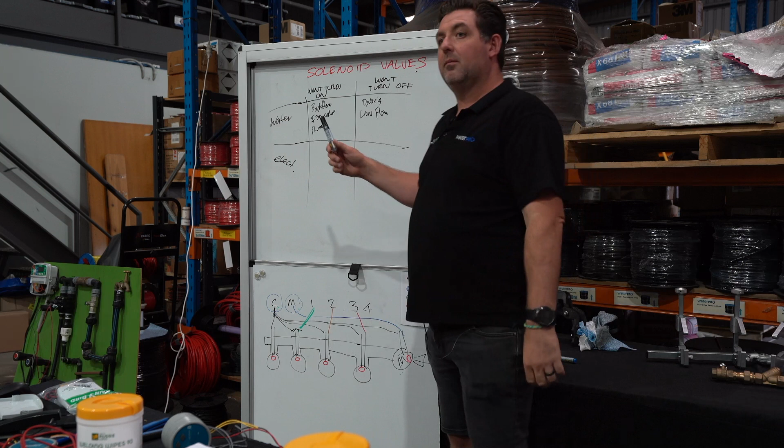Sometimes you've just looked at the same problem all day and you just need a second ear to talk to and go, hey man, I've checked the wire joins, I've turned the water meter back on, the backflow's facing the right way, I don't understand why it's not popping up. And someone here will be like, is the solenoid coil damaged or something? And you're like, oh shit, I didn't even think about it. So I'll just talk through some solenoid valve troubleshooting

for everyone. So as I said before, solenoid valves need electricity and water to operate. And so if they're not working, it's one of those two things. And what will happen with solenoid valves is they'll either get stuck on or they won't turn on. So I'll see if I can remember my table. So with a solenoid valve, it either won't turn on or it won't turn off. This is pretty much all there is, right? Electricity.

So can anyone give me a suggestion why a solenoid valve wouldn't turn on based on water? Pressure. They do need minimum flows. One situation might be that there's no water. So either the backflow's backwards, the isolation valve's turned off, there's debris blocking water, the subdivision doesn't have water, could be a pump set that hasn't been installed yet. If there's no water coming into the solenoid valve, it won't turn on.

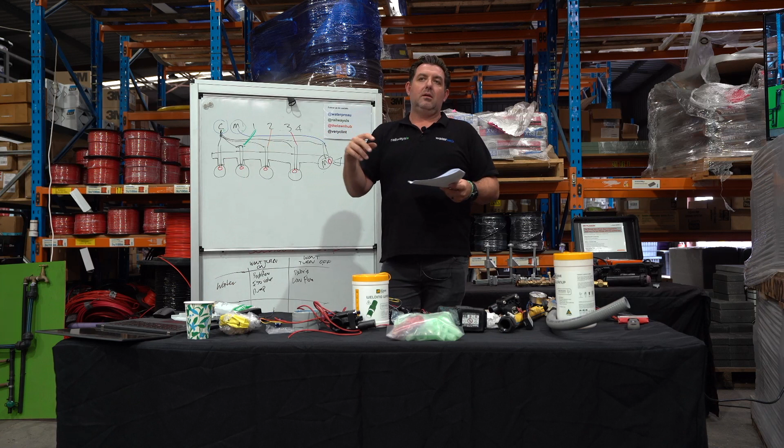And when I say break the rules, instead of having a reducing joiner, you might have to make something by sticking a bush in a coupling. You know that it's not the exact fitting that should be there, but hydraulically it is not going to have a negative impact on the result of the job, and it's all you've got, and you're in the middle of nowhere and you need to get water back on because the family are trying to bath their kids. That's fine.

I don't mean loop-de-loop drip line for 4,000 meters and then get out of there and hope no one notices, or using half mil cable just for that little bit because no one will notice on a commercial project. Stuff like that can have an effect on the quality of a system, but if you do everything else in line with those basic things, you're not going to get in trouble. And they're laughing because they've probably seen half of those things, but it happens, right?

People try to save money and save time all the time, and the reality is, especially now, there's more lens on irrigation than there ever has been before. All it's going to do is cost you. I talked about this with Mudge before: you might feel like you're representing your business, and that if you leave, it's the business's reputation that gets left behind. But I can guarantee you, everyone in this little industry knows who you are as an individual.

And if you do a great job, when I get a phone call to say, hey, did you ever know that person that worked at this company because they've just applied for a job? I'm like, yeah, they fucking did a great job when they were there. Why are they leaving? People know what you're doing. And if you try and take those shortcuts, it follows you, especially, you guys know what Adelaide's like.

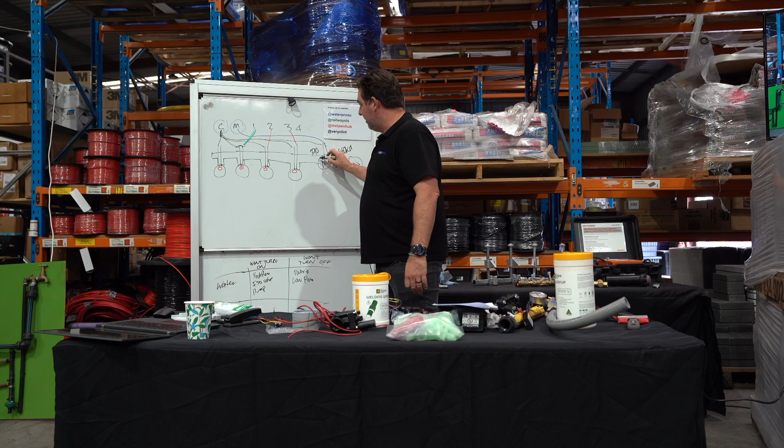I don't want to sit on a high horse too much, but there's such a good opportunity for all of you as employees in the irrigation field. It's an understaffed field. Water's our most precious resource, and there's not enough people coming through the junior ranks to fill those roles. And if you get really, really good at this, you'll have a good job, if that's what you want, for as long as you want, in my opinion. So that's enough high horsing from me.

There's a bit of stuff here about the install.

Obviously, there's a commercial side to our business. We do sell irrigation. If you choose to work with Waterpro, and there's no, you know, just because you come and do a training session here doesn't mean you have to buy from us. It's not how I work. We can kind of customize the irrigation supply to how you like it.

So we've got clients that will send a shipping container here, and we'll pack a commercial project into their container, and then the container will go, especially regional, like I think we've done it with you guys, like Whyalla, or there'll be job sites where that needs to happen, or they'll ring up and say we need cable, mainline, and valves, and we'll push that out, and then 2 weeks later they'll ask. And that's the advantage of this, obviously, the volume of stock that we hold here. We can hold quite substantial projects without needing to send them straight out.

The way people install irrigation systems kind of varies, and I'd be interested to hear from both companies. Some people, say you had an oval, like to do their laterals and work back to the valves and then work back down their main line, and some people like to work out their mainline, cable and valves and in. Do you have a preference, or is it really job dependent? I'll ask outside first. Yeah. So if you don't have access to the oval, you might be sticking the mainline in. Yep.